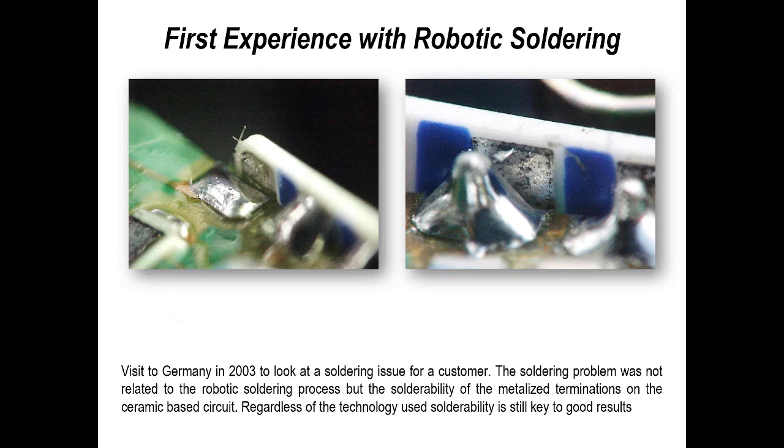So first of all, my first experience with robotic soldering goes back to 2003, and I was invited to a company in Germany who had a soldering problem. I was working for one of the material suppliers. But it wasn't actually a robotic soldering problem, it really was a solderability problem, as you can see in these 2 photographs. The metallization on the ceramic hybrid was not really suitable for the application, and consequently there was the problem, not the machine doing the work. So often the case in many process issues when you look at them.

So in terms of the robot experience, just a little bit about that first of all. It's something that I've put together with a couple of colleagues. The whole idea is bringing together suppliers of robotic soldering systems, materials, in one area and building some test boards. So that's the hands-on feature, and that will be done under COVID guidance. It's something that we'll be announcing dates on in the future. After that, the content of what we do will form more webinars, more technical presentations on more specific areas of design, manufacturing, materials, etc.

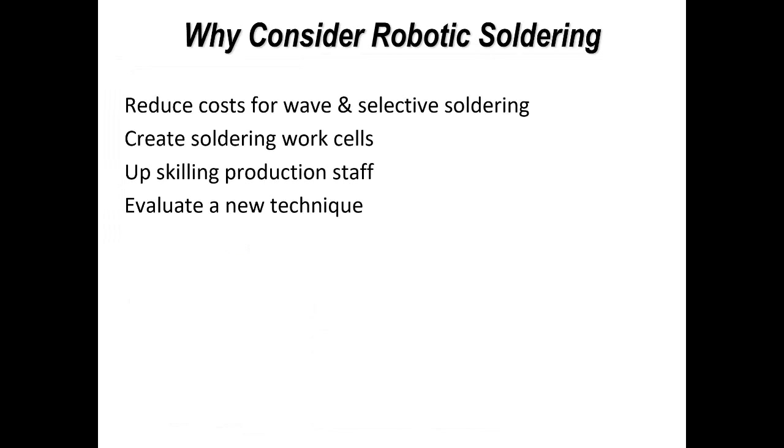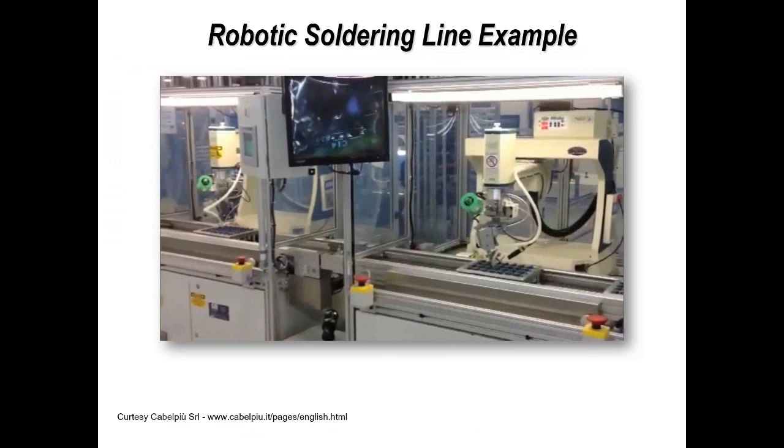This is partly - I'm going to be telling you about some results that we achieved a few years back in 2014 when I worked with Dr. Chris Hunt of the NPL on a high temperature soldering project. One of the two reports, which you can freely download from the NPL website, goes into our experience with robotic soldering, but using high temperature alloys as opposed to just traditional lead-free alternatives. We'll mention some of the results that we got in that study as well during our webinar, our time together, but you can find out more of both of these reports free of charge from NPL.

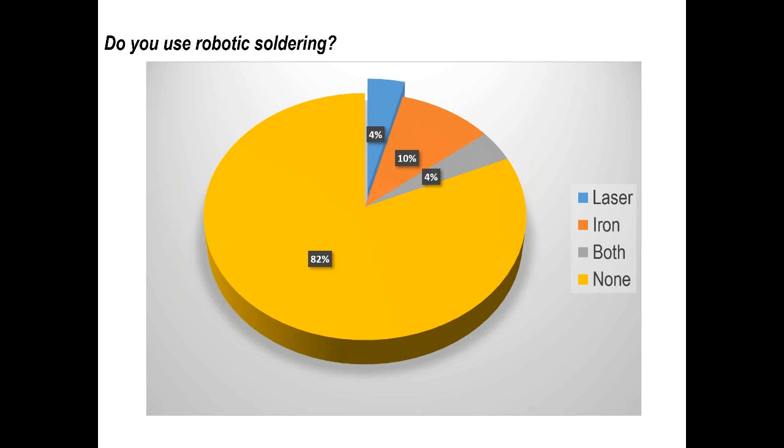A little bit of information that we gathered from a previous webinar in terms of a survey - we'll be running four mini surveys today, and you will receive the results of all of those. The last time we conducted this survey, we asked, do you use robotic soldering? As you can see here, it's a fairly small percentage of companies using robotic soldering, either laser, contact, or both, but a high percentage not using any of these techniques, which is not unsurprising, but hopefully the result on this particular question, when I pose it later on, will see quite a dramatic change, I believe.

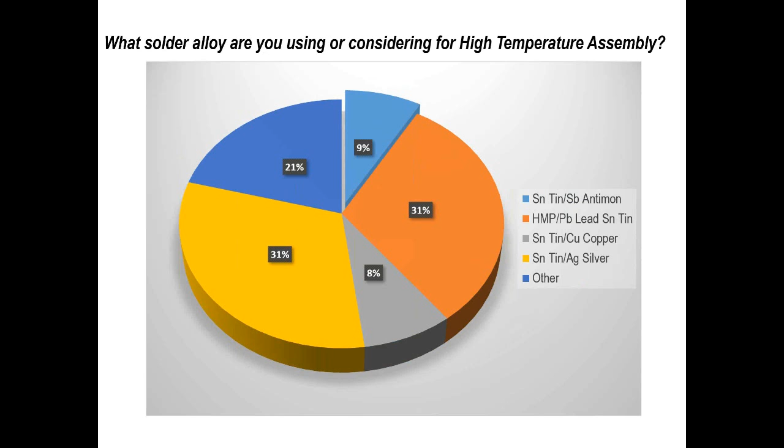In addition, we also looked at the materials that people wanted to use. Again, on one of the survey questions I'll ask this afternoon, we'll look at that - what materials are key for you to use. We were in fact concentrating on the higher end temperatures in the previous survey, but

you've got the opportunity for low temp as well when we come to that question. Now, the things we did on the NPL project using robotic soldering, but also using hand soldering and selective soldering as a comparison, we assembled polyimide boards. The reason for using polyimide boards originally was because the product was going to be exposed to high temperatures. As you can see here, we built boards with different solder alloys. We also built some boards with intrusive reflow technology and epoxy materials for other surface mount components, which won't be

discussed this afternoon, but is in the reports that I mentioned. We then took the boards and exposed them to 200 degrees C for 500 and then 1,000 hours in a static oven, with microsections, X-rays, optical inspection. We did other testing on the boards as well to understand the effect of thermal shock and peel strength results on other substrates, materials, and copper foils.

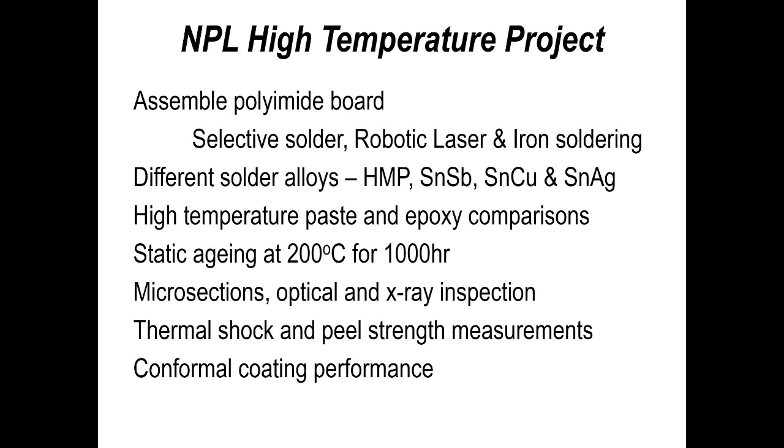So there's some other material in the other two reports over and above the specifics relating to robotic soldering.

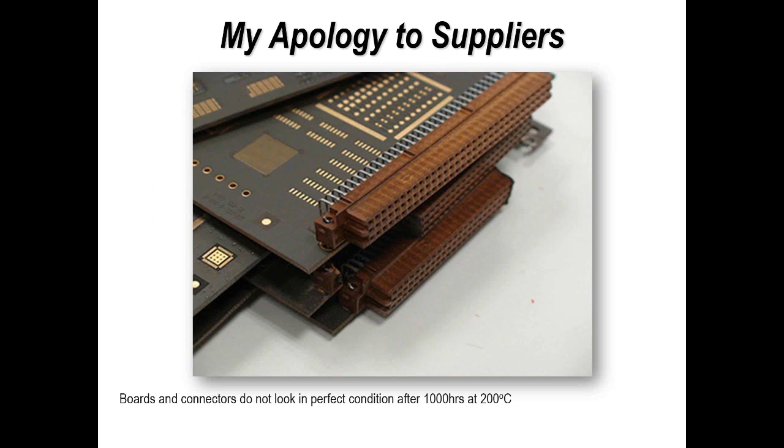And I always like to show this slide and apologize to anybody who supplied me boards and connectors for this particular study - they don't look very attractive after you've stored them at 200 degrees C for 1,000 hours. So I apologize to Merlin and I apologize to Harting on this particular occasion. But thank you, they still work perfectly.

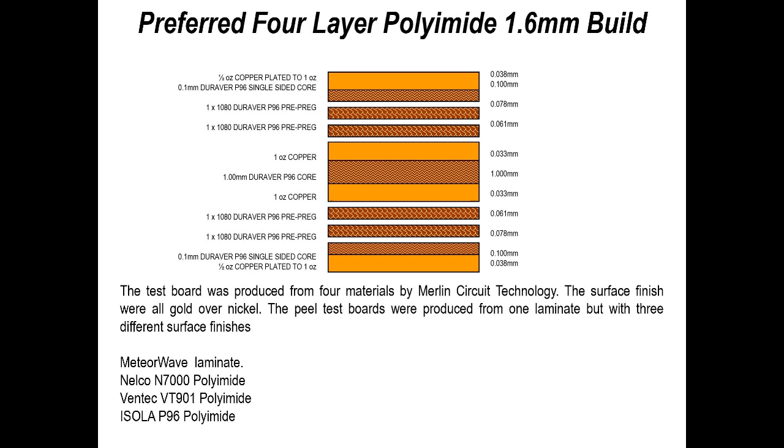So the polyimide construction is here. I won't go through it because you've got it as a reference. You can see the standard construction we used on our test boards, and we used 4 different materials on the NPL project.

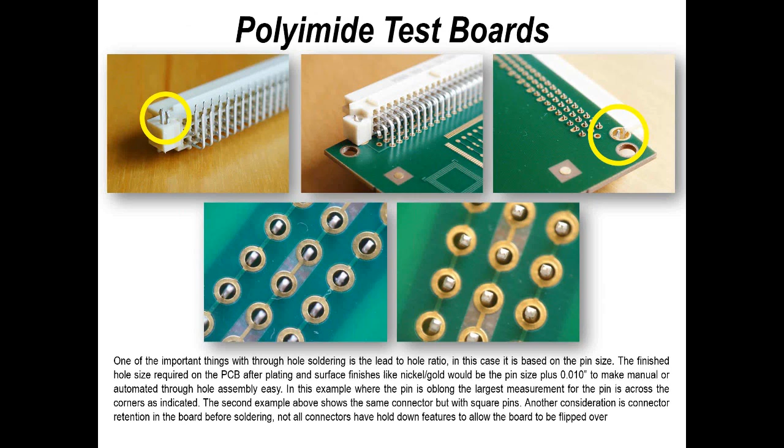The project involved simply soldering this 96-way connector. It's a high temperature connector, held in place with clips at both ends, allowing us to rotate the board and solder. As you can see here, we had 2 different types of pins, a square pin and a more flat pin on some parts, and that's all to do with cost reduction when manufacturing connectors. Connector pins used to be round, which was nice and easy to calculate hole to lead ratio. Then we went to square, and now more commonly we use flat punched connector pins.

So in terms of design rules, on the new board I'm using for the experience, and also on this board, we used what I call my standard design rules: the maximum pin size plus 0.010 of an inch gives me my finished hole size. I use this for all types of soldering operation.

Standard pads, but with robotic soldering, with some of the simpler robotic systems, you might want to extend the pads slightly, have a slight tail to it, a pear-shaped pad perhaps, and this allows you to have a landing position. So rather than hovering above the surface of the board, which some companies and systems allow you to do very successfully, if you need to come in contact with the board surface, then you've got a landing area which won't damage or catch the edge of the pad - you're actually coming down to the pad area.

In terms of solder mask rules, the same - standard pad dimensions, solder resist 0.006 of an inch larger than the pad size. It is possible also to use resist-defined pads, and sometimes that is done on smaller pitch connectors if you're doing drag soldering with a robot. The reason being that you're still making contact with the pad, still transferring energy to allow the soldering operation, but minimizing the possibility of

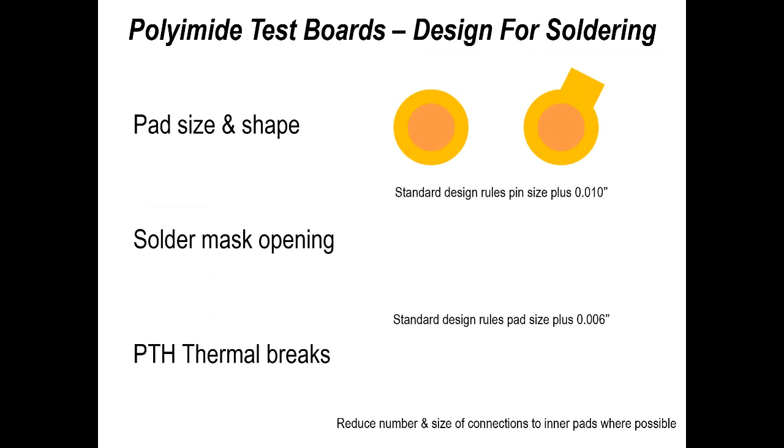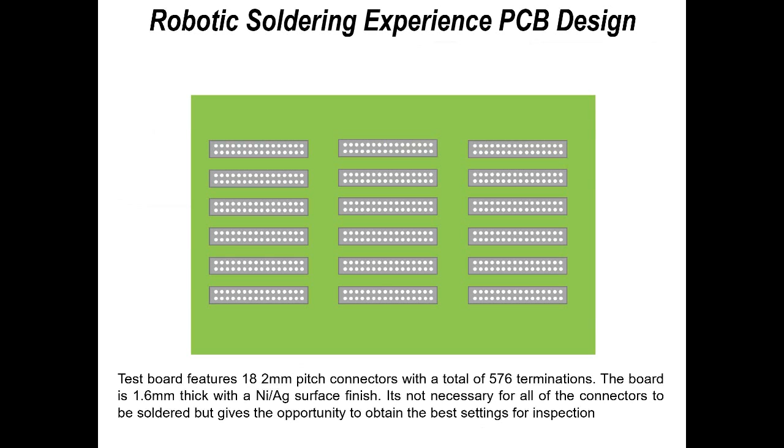So by adjusting those and maximizing to what the designer wants, but also what the process engineer wants, that's a key thing to get the best results. We've done that on the test board I'm using in this experience, and also on the boards we built at NPL. So basically connectors, standard through-hole terminations, modifications on resist and pad dimensions to aid the soldering system you might be using in your product or process.

I mentioned thermal breaks. This is an example of a thermal break in the inner layer. Our test board is a 4-layer board. It could be more, but 4-layer is economical for this application. You can see the same hole size is used, but we've increased the separation distance between the copper and the inner layer copper, or reduced the track width, or reduced the separation, using perhaps one connection, two connections, or four connections. These variations are incorporated into the test board to see the effect on soldering parameters. It's a standard thing that we do.

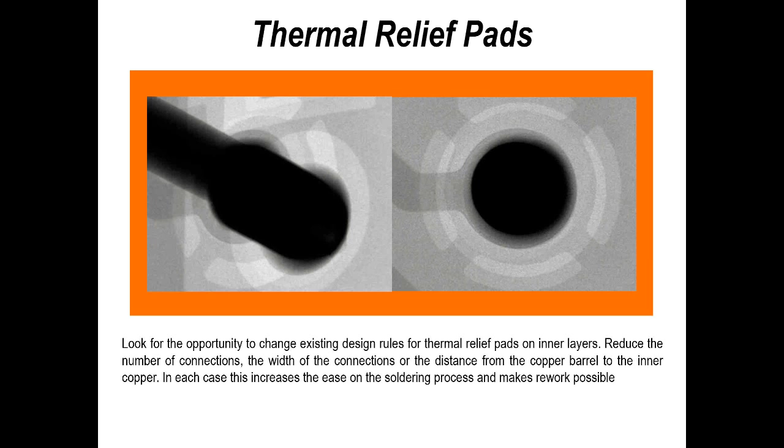If you look at this in X-ray, for those not familiar, this is what you might see. You can see the individual terminations fanning out from the solder connection area. I normally use this photograph to explain to rework operators why they're having such a hard time, and of course blame the design engineers for it, but there you go.

Now, in terms of assembling a board with a connector, one fairly simple thing we've got to consider is how the connector stays in the board. It won't just be connectors, it can be any through-hole component, but you've got to think about how you hold it in position. If you've got a connector with retention clips, that's nice and easy - you can flip the board over and you don't need any other tooling. If you can't do that, you might need a pallet, so you'd load the connectors to the pallet, load the board to the pallet, and run that through your process.

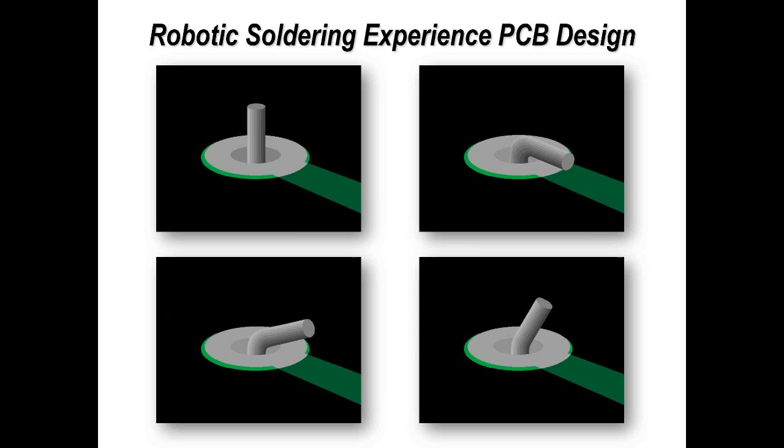But equally, you've got to think about the pin position and the consistency of the pin position. If you've got manual cut and form pins, they're inevitably going to be in different positions. So if you're programming your system to make contact with a pin, that could be an issue where you get inconsistency. Just think about the relative pin position in the plated through hole, the length of the pin, etc. Very trivial issues, but they can become major issues if you allow them to do so.

Now, there's a variety of different solders out there. These are the solders we used in the NPL project. As you can see here, there are the traditional lead-free materials, as well as some of the higher temperature materials. One of the things I want to do is work on low temperature alloys because they're becoming available with cores in them - you can get cored wire, but low temperature, reflowing at 138, 139 degrees C. That's not something I've done at this moment in time yet, but these are the materials we used in the NPL study.

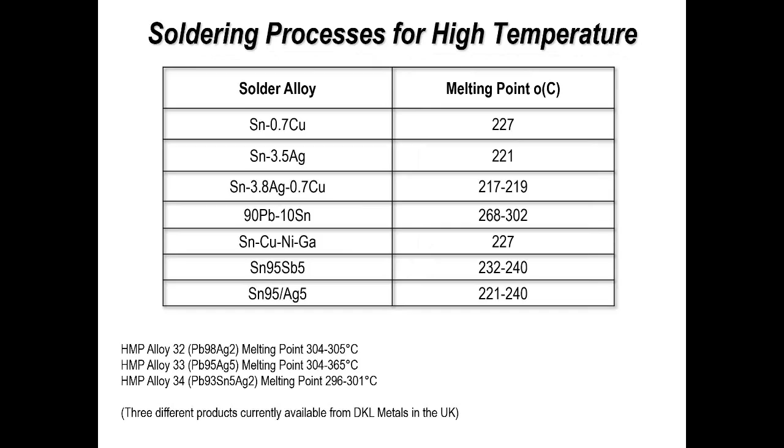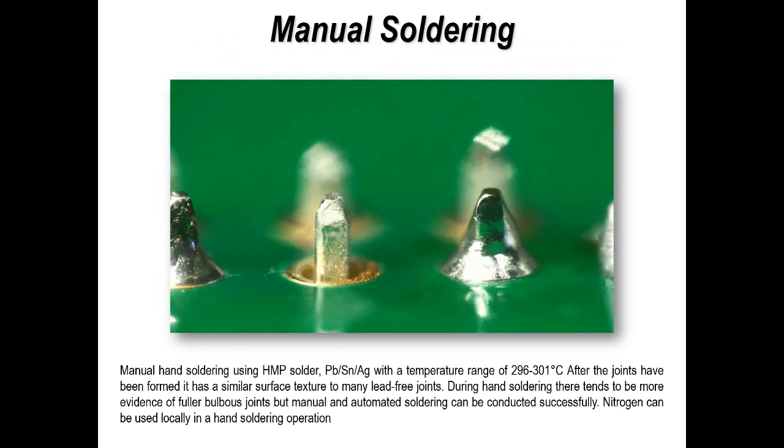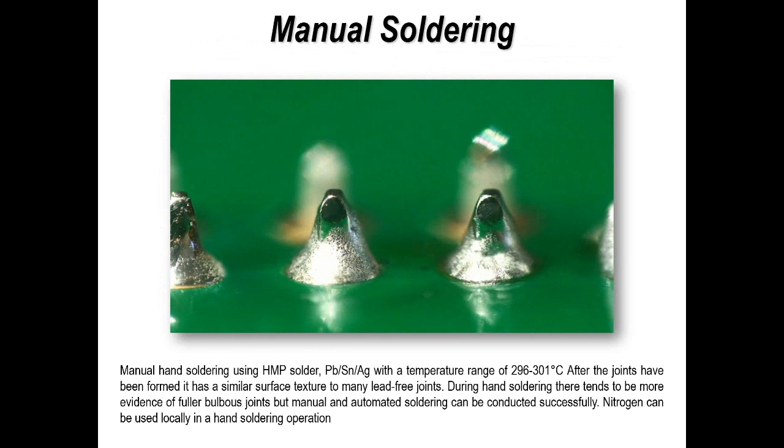And it's the same when you're looking at through-hole fill. When doing manual soldering or robotic soldering with higher temperature materials, you do get or can get variation. Although these joints are perfectly good, there is certainly variation in hole fill, and you certainly get that when you start using high temperature solders with hand soldering. One thing with hand soldering or robotic soldering - remember that when you've made a joint, if you go back and try to add a little more solder, because you're not actually adding flux to the opposite side of the printed circuit board, the visual appearance will be different.

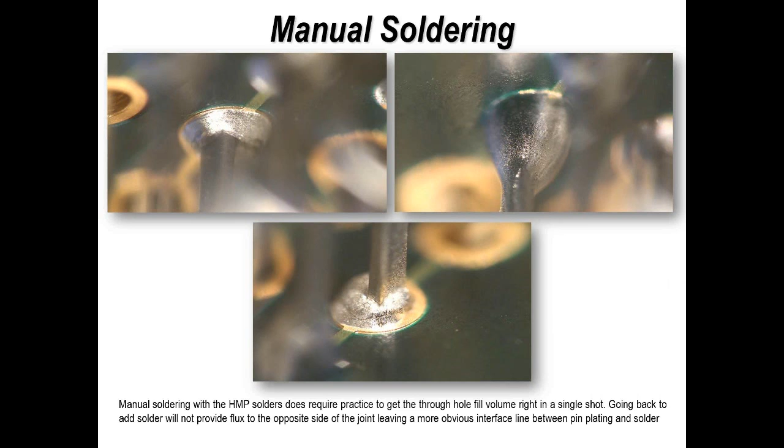Here is a good example of me touching up a joint, and you can question the wettability or solderability in this example, but the one thing that was missing is the flux. There's no flux left to improve that result. So that's just a thing to think about.

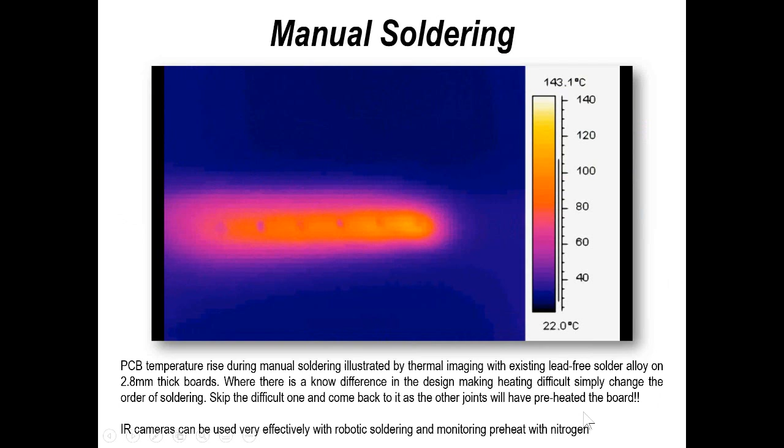Another quality control and process tool I've used over the years is IR for measurement and assessment. It's a beautiful technique, so if you have an IR camera in your facility, it's useful. It lets you see the residual heat held in the board. If you've got a difficult position to solder, you can jump over it and go back later, because heat remains in that area. So you might solder contacts 1, 2, skip 3, go to 4, 5, 6, 7, then come back to 3. You can do the same thing with robotic soldering - that's the beauty of it. So if you have an IR system, use it, because it's very useful for a number of applications with robotic soldering, which I'll mention.

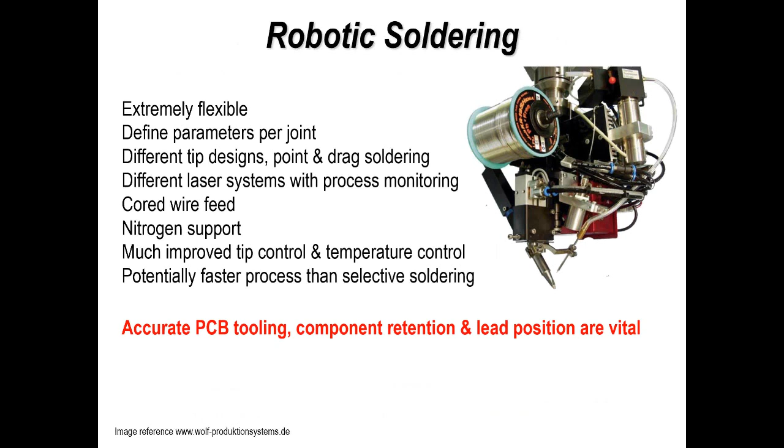That's an advantage to many people. One of the things a lot of people forget about is accurate tooling. A robot, you tell it where to go and what to do, but if what you want to solder is not in the right location, or not in a consistent location, that's a problem. So concentrate and make sure you organize or select a system and the appropriate equipment to minimize variation in the relative position of the joints you're trying to solder. Don't underestimate this as something you need to look at.

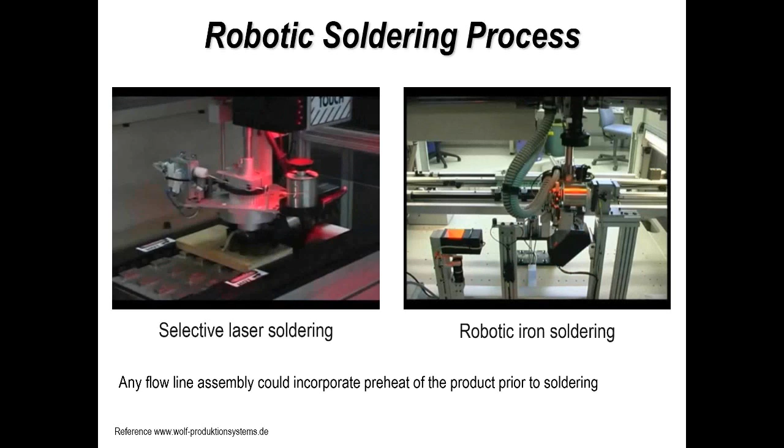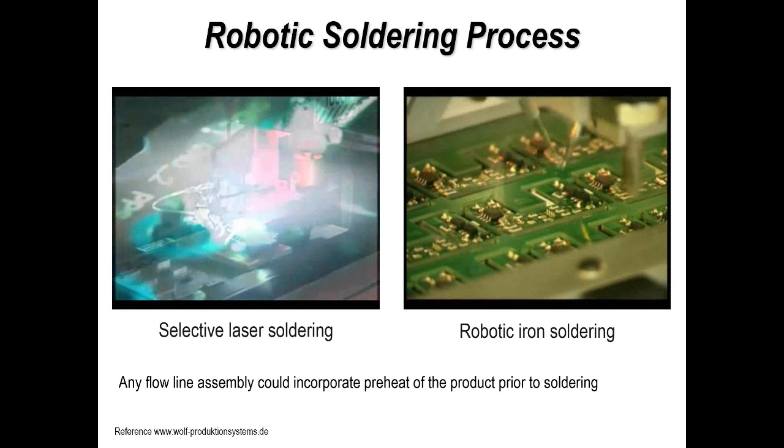So just a couple of examples of robotic systems operating. On the left-hand side is a laser system where we're producing joints, and on the right-hand side you can see an inline system which has been added to a conveyor. You can see the joints being produced on the left and on the right. These are just two examples of robotic systems in the marketplace that I was using in my original study.

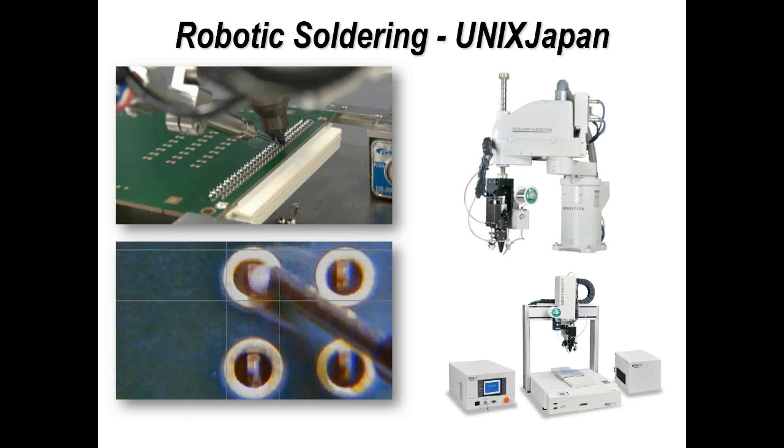Here you've got Japan Unix, and on this first board we're actually doing drag soldering with a special tip, drag soldering on a 2.5 pitch connector, one row. In the bottom video clip, again you can see my same test board, and we're doing laser soldering to the individual joints. That gives you a feel for what we're talking about in terms of the process we're using for this technology.

So if we flip back for a second, remember that when we're doing a soldering operation, we're basically bringing a tinned bit to the joint area. We're introducing solder to the joint area, normally from the opposite side if we're talking about manual soldering, and this makes sure the joint areas to be soldered are up to temperature. This is how I train people to hand solder, this is the fundamental way you do it.

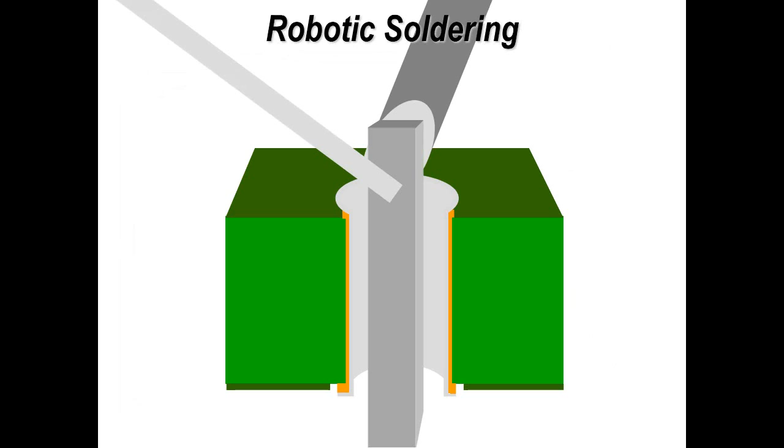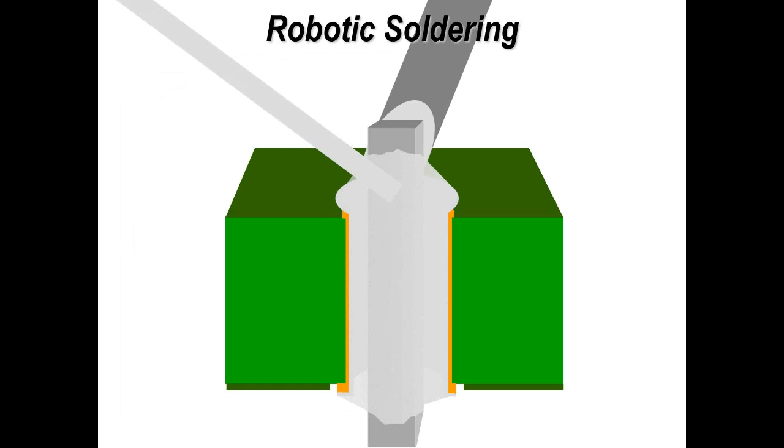But with robotic soldering, you may be introducing solder in exactly the same way, directly to the soldering iron tip, or you might design your system to have quite a wide tip which comes into contact with the surface of the pad and the contact position, and then add the solder slightly offset, onto the face of the soldering iron tip. This overcomes some of the variability you can get with pin position. These are subtleties you need to practice and learn about when doing robotic soldering, particularly your programming, and when talking to your suppliers. But this is fundamentally what we would do.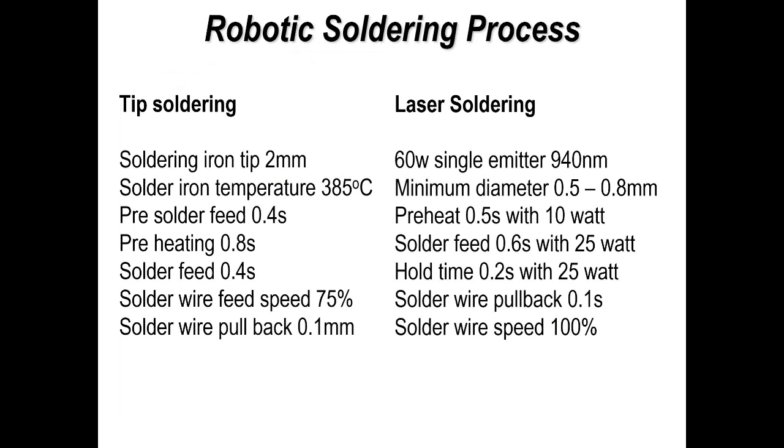So just to give you a feel for some parameters, these are typical parameters you might come up against during a soldering operation or a setup operation, ones I used in some of the studies I did at NPL. You can see typical cycle times, etc. On the laser side, you can see the cycle times, the delay times, and the energy used during the soldering operation on that 96-way connector I mentioned previously.

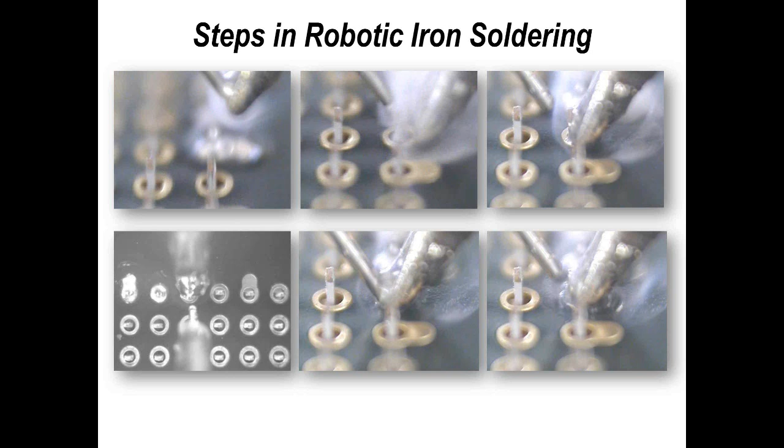So let me just step you through. If you're looking at contact soldering, i.e. a soldering iron on a robot, to break it down into simple terms: we tin the tip, we may have cleaned the tip—we'll look at cleaning a little later on—we bring the tip into contact with the pad and pin, or just the pin. When that gets up to temperature, because we've done previous trials or direct measurements, we introduce the solder to the opposite side of the joint, as we would with hand soldering, or alternatively add it to the surface of the tip. That's fundamentally how the soldering operation is done.

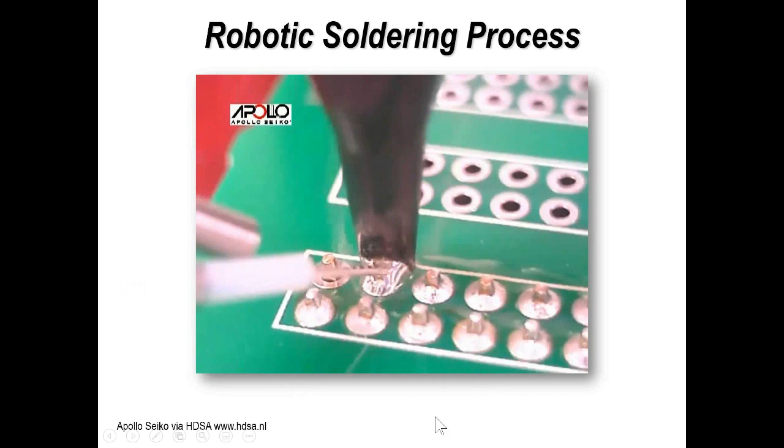If you look at this example, you can see a wider tip being used, and the machine operator or setter has set up the solder to add to the soldering iron tip, but it's slightly offset from where the pin is. So again, it's all about setting up the process most appropriate for your particular product.

Now on the laser side, in these multiple photographs taken from one of my video clips, you can see the board and the solder wire above the surface. What's actually happening is we're introducing a small amount of laser energy to the board to preheat it. When it's up to temperature, we introduce the solder and continue to feed it based on the volume required to fill the hole and give you ideally top and bottom side fillets, which is what we want in our process.

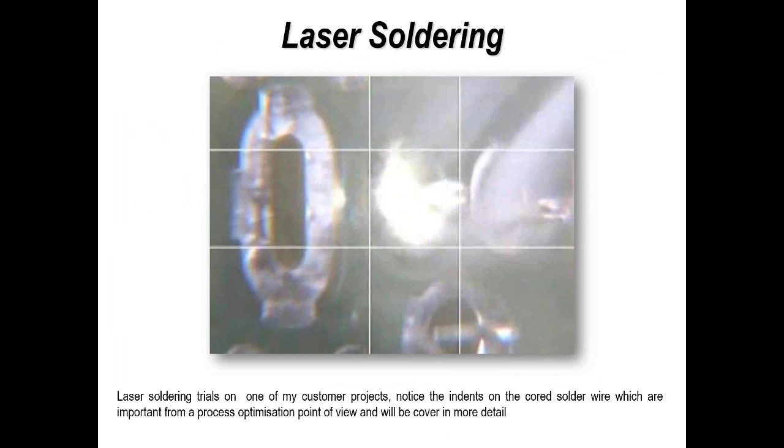So if you look at this example, another video clip, you can see a practical example on a printed circuit board with a number of different through-hole terminations being soldered. There's no soldering iron, you're just using the laser energy, and adding solder to the joint to finish off the product.

In terms of how you get the information to continue that soldering operation, each of the different suppliers have different levels of software to allow you to capture information. You can either teach it, which is slightly laborious, or you can draw in the board, and there are different levels of sophistication in the software available within the industry.

This is just an example of one of my old test boards. You can see at the back the connector being drawn in, which gives us the locations, and then we can select the individual pins and set up the parameters we want to use for those particular parts.

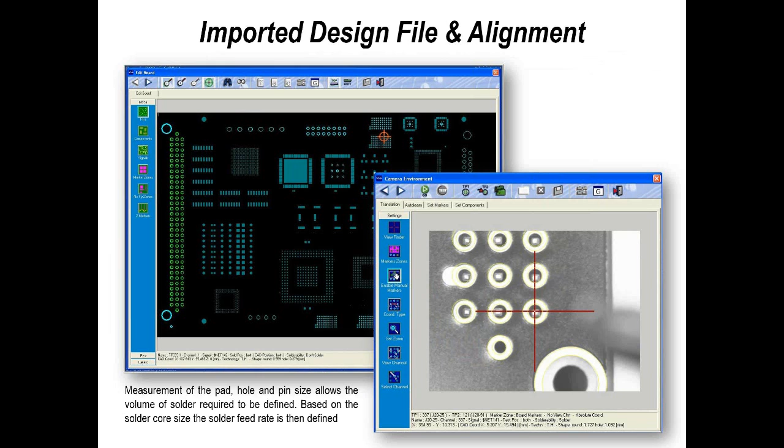Ideally, all of those parts would have the same basic parameters in terms of time and temperature. But as I said earlier, if you've got different thermal breaks, which is what we've got on our evaluation boards, there will be a difference in the required settings.

Just a couple more examples before we take another survey poll. These are some of my trials on the 96 pin connector on a multi-layer board. You'll notice on this, and on the next example, there is a lot of flux.

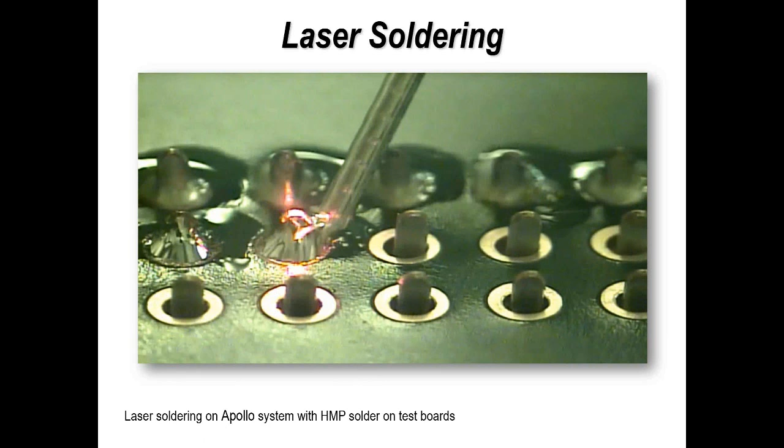Remember, some of the materials used in these studies were high temperature materials, and because of that the basic material has a high flux loading. So we're not talking about traditional lead-free, and most cored wire manufacturers have worked hard to improve not only traditional hand soldering with lead-free, but also robotic soldering. You'll find differences in the amount of flux present on the board surface. These high temperature studies were done in 2014, and there's been a lot of development since then, but fundamentally the soldering performance was good.

You just have to look at the necessity in these examples, because of the alloys, to clean the product for visual and possible reliability reasons. So that's a couple of examples of what you might expect with very high temperature materials using either process, but there's also a significant improvement in the amount of material left behind with the materials now being introduced.

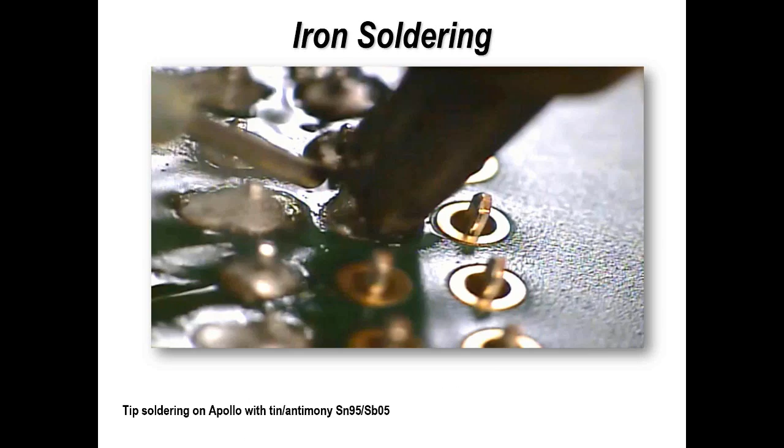Cored solder wire - there's lots of good suppliers of materials out there. You've got to look at the size, and typically some of the materials I used in my study were 1mm, 0.8 and 0.6. Those are the materials that I use, and you'll find that nearly all of the suppliers can handle that sort of range, and possibly smaller.

There hasn't been any trials on low temperature so far, and that's one of the reasons I'm very keen to see some results on some materials that I've got. Cored wire has obviously got flux in it, and flux is volatile. The suppliers have taken quite a lot of effort to improve the performance, so we'll try and understand what the issues actually are.

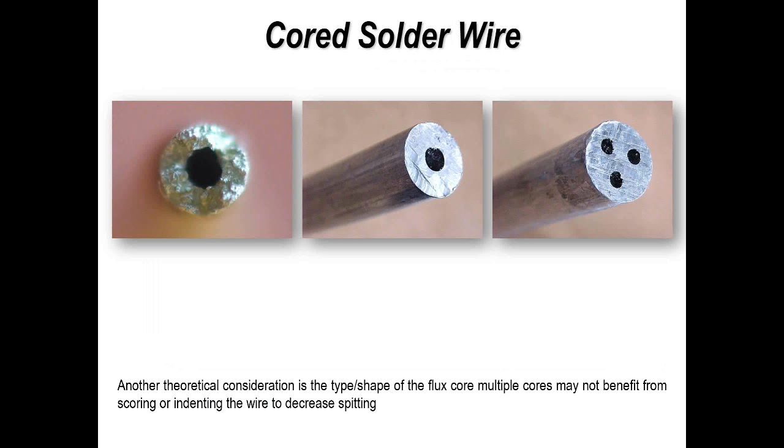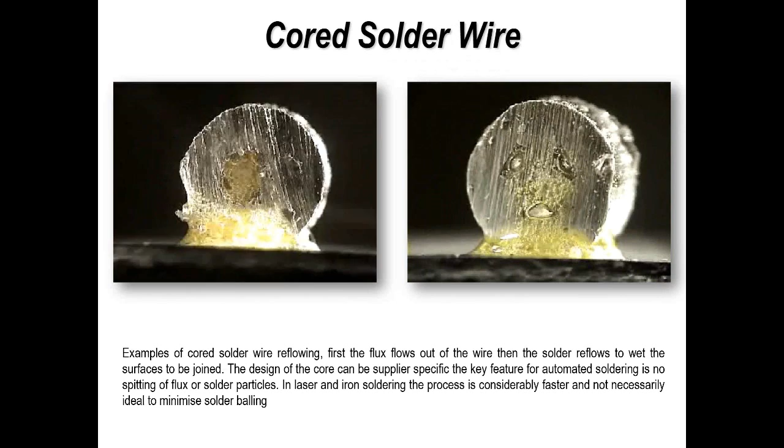If you look at a cored solder wire - now I'm just showing an old video of mine where I'm reflowing two bits of cored wire, one with one core and one with three cores, and you can see the poor guy on the right-hand side crying as he disappears and falls away. But it just gives you an idea of what's actually happening. So the flux flows out from the solder wire, and if we can control that in some way, then we can control and improve the soldering performance.

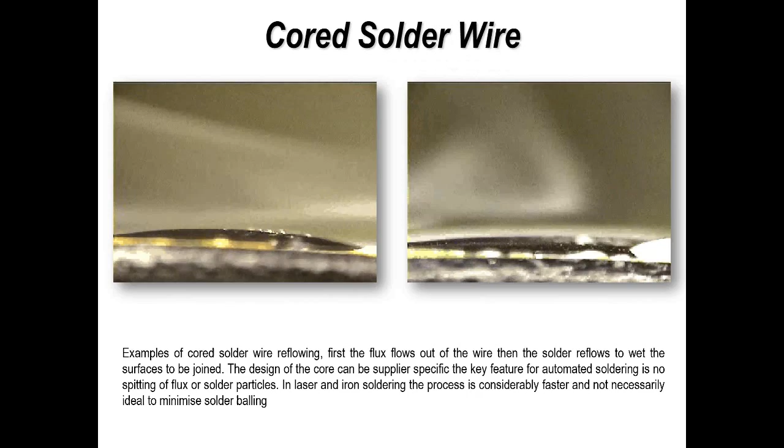If we take a printed circuit board - this is just an example of a test board which has got some fine pitch packages on as well as simple through hole. One of the problems potentially you or anybody could face with robotic soldering is solder balls. This is just a couple of examples from trials of my own, and what I've done here is circled the solder balls. This is a well-known issue.

If you step back, it's been around for quite some time, and it still is today. But we can control this in two or three different ways. That is the reality.

And part of the reality is adding the solder directly to the surface of the soldering iron tip, which is at an elevated temperature - this causes spitting. Trying to go too fast increases the possibility of spitting.

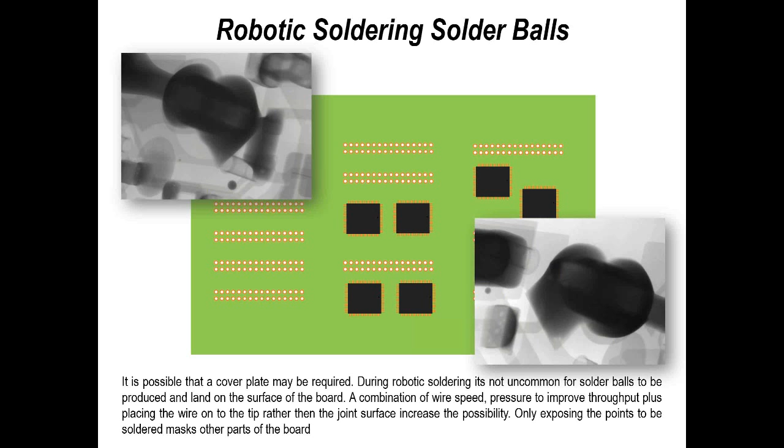So you will find, if you go into some factories, some companies, the way they've gone to overcome the problem, or perhaps temporarily improve it, is to cover the board. In this example you've got a cover plate, and I've worked in two factories like this, where we're just using a cover plate. We're soldering 2, 3, or 4 connectors on a board or other terminations, but protecting other areas to prevent any solder balls landing on the surface. This is particularly true of the automotive industry. It's an extra thing that can be done, and it can be done as a temporary thing - not ideal, you don't want it forevermore, because it does restrict the way in which we can effectively use some of our tools.

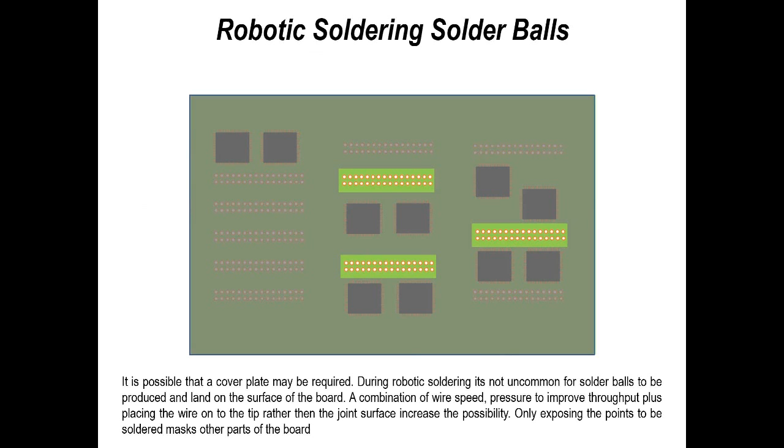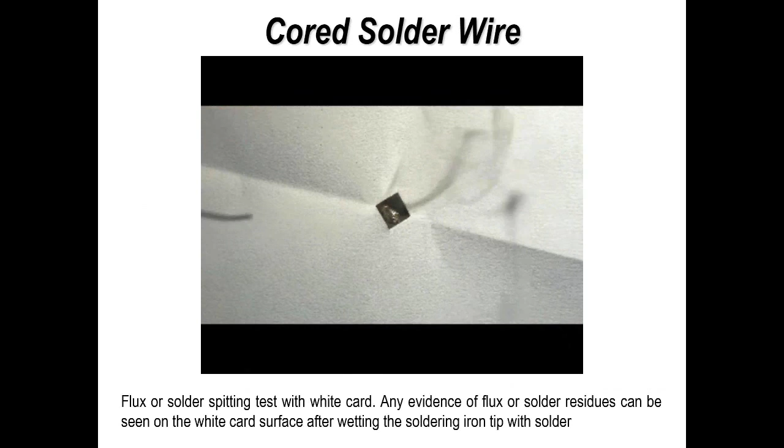If you look at solder wires, all of the suppliers nowadays will be able to demonstrate their solder wires, and you can look at the performance. You can do simple tests yourself where you add solder to a soldering iron tip through a hole in a piece of white paper. Very simple, but it works, and you can see the effect of spitting - where the flux actually disappears to, and also where the solder balls appear on the white sheet. So that's a very simple, very crude way.

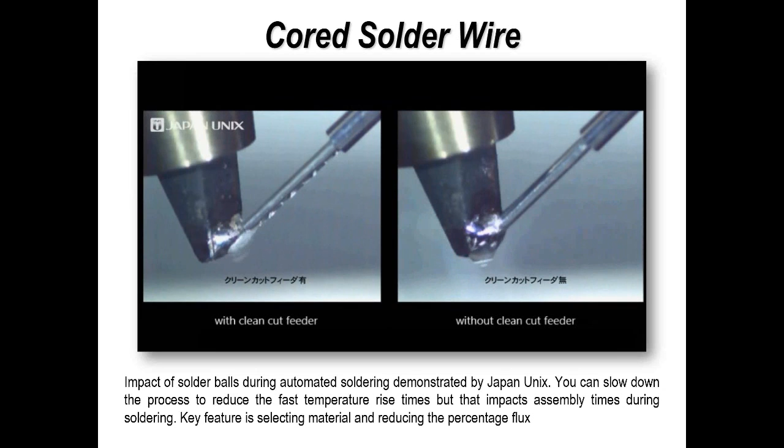This is all about wire preparation, and this is something I learned early on with one of my projects. Basically, if you've got a volatile material sealed within a lump of solder, as soon as the solder becomes a liquid, there is an expansion of gaseous material from the surface, which can lead to solder particles being spat around.

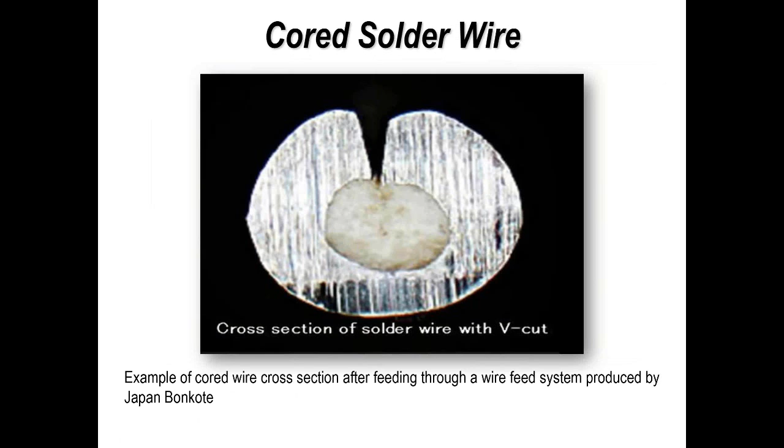This example cross-section here is from a small company in Japan who developed a simple method of V-scoring wire. They did this for hand soldering operations during the introduction of lead-free, and they used this particular technique.

You'll find that the majority now of robotic soldering systems, be it laser or contact soldering, have in their feeder mechanism a blade which indents the wire. Now, I choose to believe, I may be wrong, that originally whoever came up with the methodology for feeding wire stumbled across the potential for eliminating solder balls, and then everybody else followed suit. That's my personal take on it, but it's been developed very well by different suppliers.

So these are photographs of mine where I've got some wire that's been indented, but what I've also done is x-rayed it so you can see the core. As you know, with an X-ray, if you've got a solid material, it's dark in color, and if there's a void, it's light in color. So you can see the void line where the flux is, but you can also see the indents within the wire which are present.

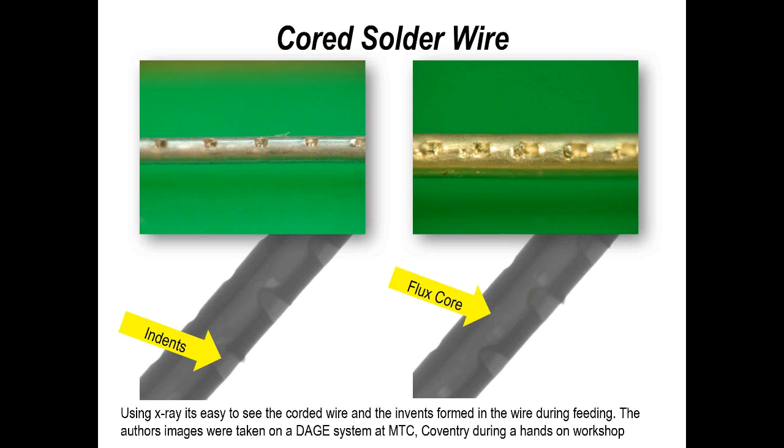And what this does is allow the volatility to escape during the soldering operation without projecting solder balls over your product. This little video clip highlights this with Japan Unix on their system. If you look carefully with this high-speed video, you can see the flux coming out of the holes prior to going onto the soldering iron tip, which minimizes the possibility of this volume of material being spat out on the surface of the board.

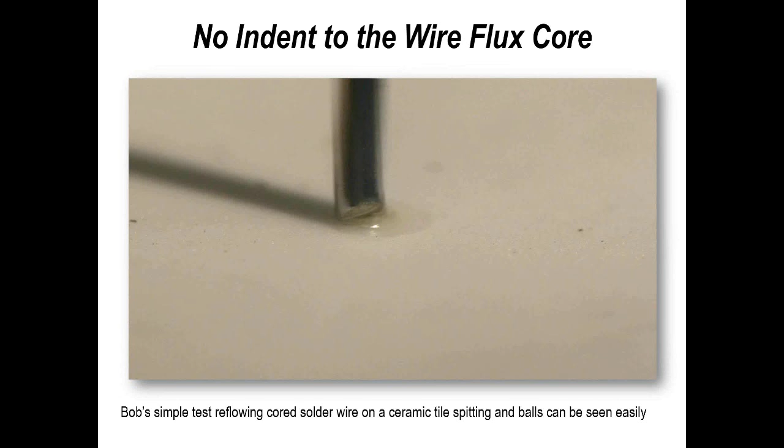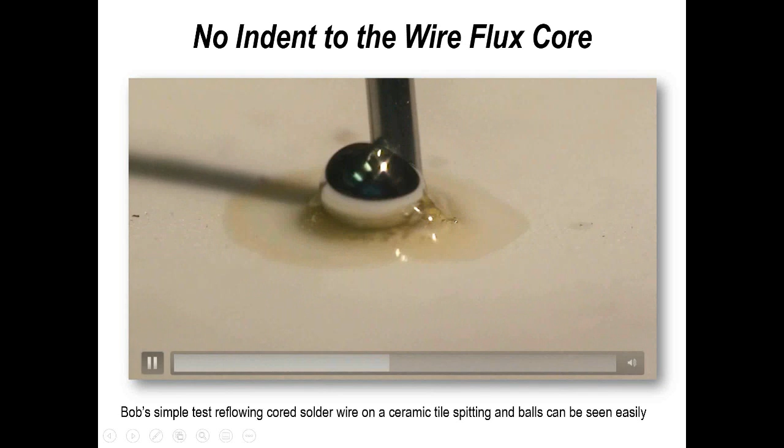So it's just a nice example. Now, Bob Willis, I always have to do it a simpler way. This is a little experiment that I did just on a ceramic plate, a normal ceramic plate that you might use for solder paste evaluation.

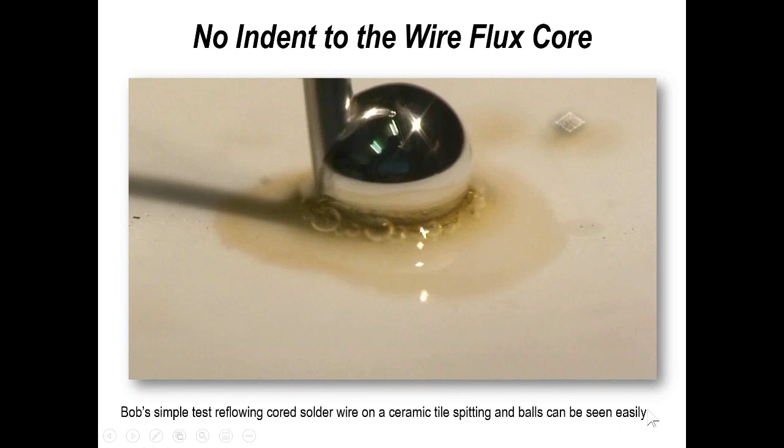And if you've got no indents at all, you will get solder balls. The solder balls you'll be able to see on the surface of the white ceramic, and that's the reason why I used it.

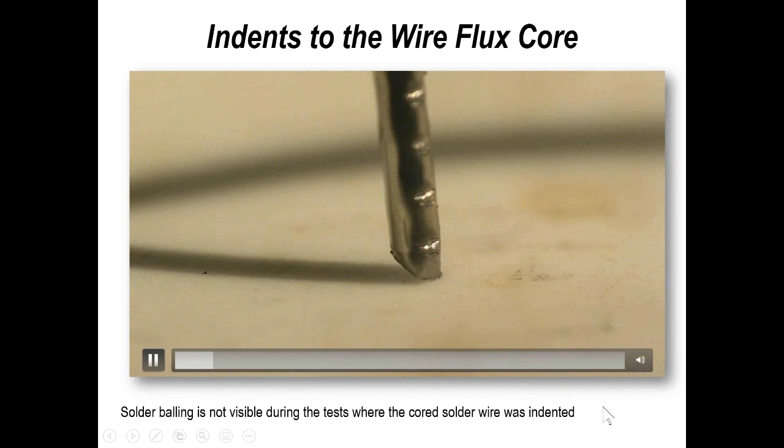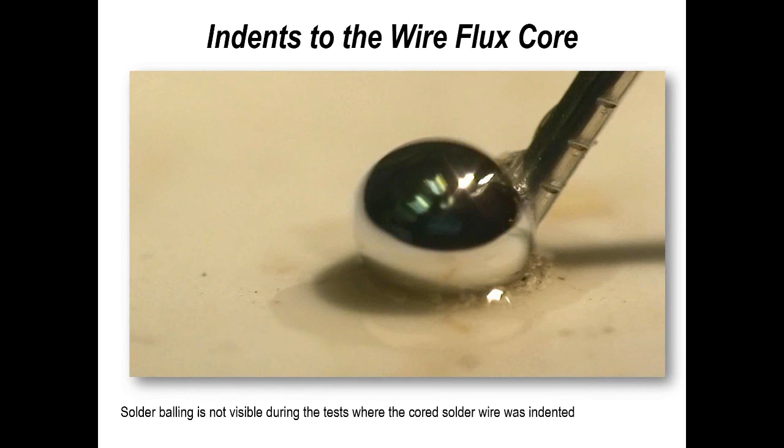If you look at this video clip, you can see on the right hand side the marks on the surface of the solder. So if I run exactly the same video clip, you'll see the solder liquefying on the surface of the ceramic. You can see the flux coming out, but there's no solder balls. So again, releasing that energy early significantly reduces the volatility.

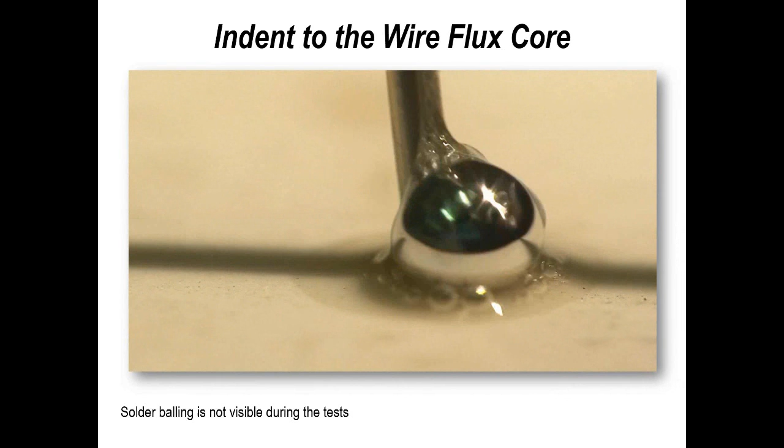And again, you can see exactly the same thing happening in this example. The third example is the solder wire again, but I'm not reflowing it, I'm just heating it up. So in this example, you can see the liquid slowly coming to the surface of the wire from those indents.

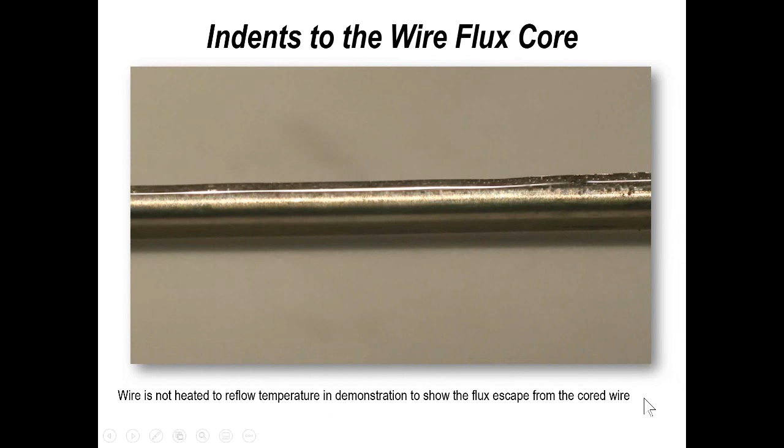So that indentation is quite a crucial thing. Controlling that, making sure it works successfully. Again, most equipment manufacturers have the capability of modifying the amount of indentation, or even changing the wheels which create it in the first place. So that's just a little thing you want to be aware of.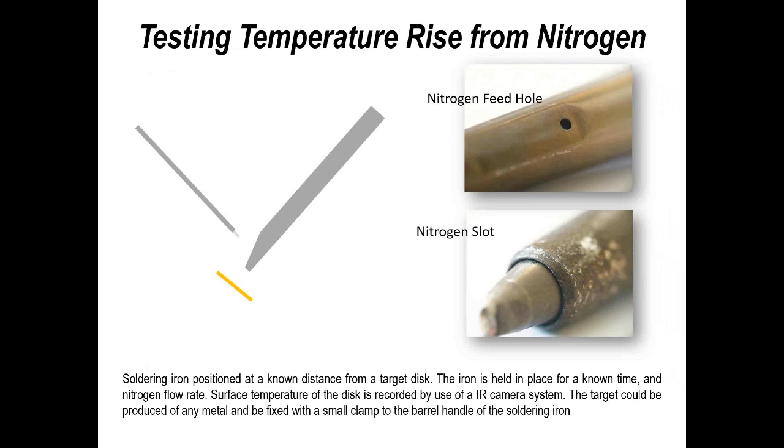Now, if you're looking at temperatures and measurement, I mentioned using nitrogen - well, controlling the flow rate. Some soldering iron manufacturers' systems used on robotic systems have developed their technology to allow nitrogen to be introduced around and across the surface of the soldering iron. If you control the flow rate of the nitrogen, you can use that as a preheat. So you can perhaps get an improvement in terms of soldering of parts of a second, but over a day, that's minutes.

So again, that's something that might be advantageous to you, and that preheating exercise can be beneficial. Introducing nitrogen across the surface of the joint and the soldering area has two benefits, which you can see in these examples.

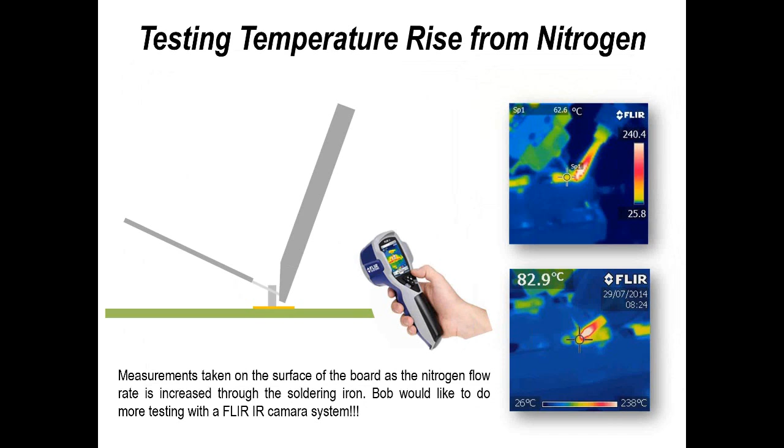Also, the angle in which you introduce the solder to the soldering iron tip or to the rest of the joint can be analyzed, again using IR technology to do the measurement. So if you have a system, I think use it because it is beneficial.

And I apologize, everybody will be rushing out and buying an IR system. So if you've got a budget to spend, that's something that's a useful tool. And if anyone wants to send me one in the post to use, I'm more than happy to receive it.

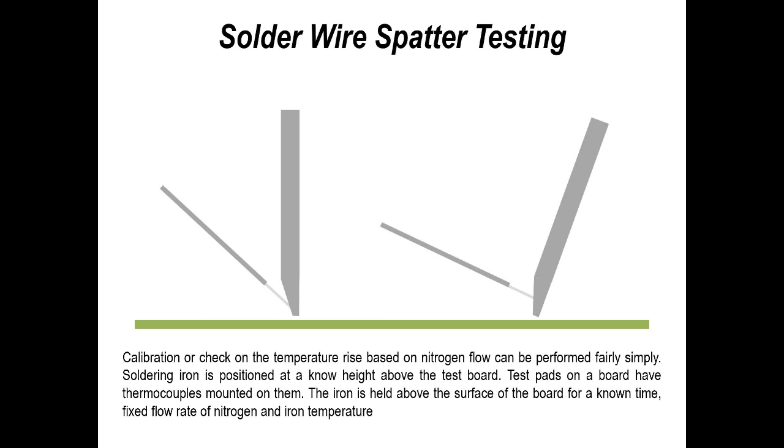You could also use another simple technique where you're actually measuring flow rate. Just like my wetting indicators I use in reflow technology, you could use a pattern where you're introducing solder to a test pattern and then looking at the spread-out rate for different parameters, different nitrogen levels, different cored wires that you're using.

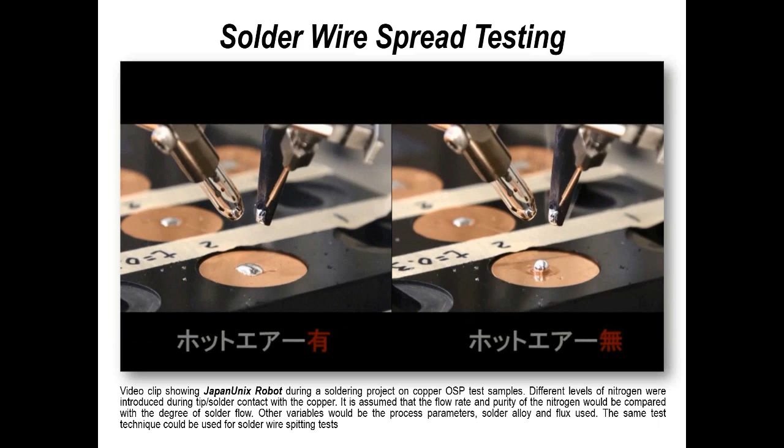Now in terms of soldering irons, designs, and tips, you've got to look at the temperature response time. There are tip suppliers and suppliers of soldering irons themselves who have better responses than others, and that's something you need to evaluate yourself.

But also the important thing is that if you are mechanically scrubbing the board, if you are mechanically making contact with the board and putting any pressure on the tool, potentially you can reduce the working life. So where you're able to minimize that wear characteristic, you get a better working life, and you're not going to run out of tips quite so quickly.

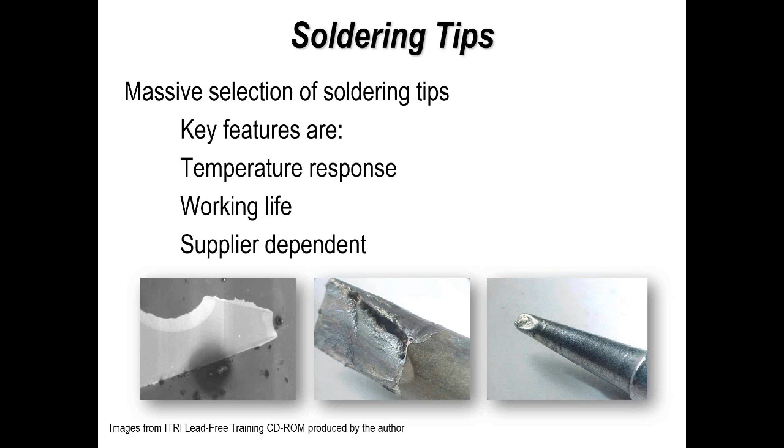Also, you need to evaluate the tips. Some tip manufacturers are exclusive to a particular supplier, and for good reason, because of the calibration and traceability. But you need to understand that when you're selecting a system, because it can be an expensive commodity when we're talking about tips and tip replacement.

Now in terms of cleaning tools, there are a variety of options, and basically a cleaning tool is similar to what we do with a soldering iron. You either use a sponge, a moist sponge, which is still my preference, I have to say, if used correctly and you train your staff correctly.

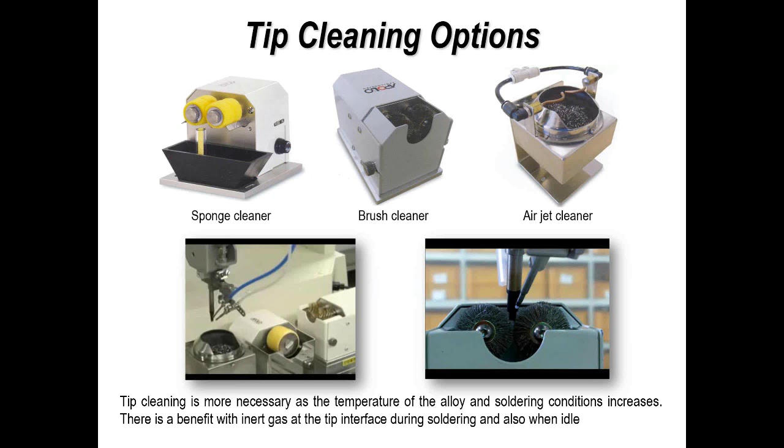But there are other techniques, and I just wanted to show the sponges, the brushes, air jet, where you're actually blowing off residue from the surface of the tip. So there's three or four different technologies that you can consider, but it's certainly something that is necessary as part of your work cell for your soldering process. Evaluate them to see what works successfully for you.

Okay, so just looking now a little bit at the soldering and soldering results side of things. I wanted to show you some information based on the trials we did with the higher temperature materials. But before that, I wanted to go on to our third question.

Our third question is, what do you expect? What is your aim? What do you need to do with your current soldering process in terms of inspection? So what class do you expect, do you require of your product? What is the most common class that you work to on products today, and or you would equally require from a robotic soldering system?

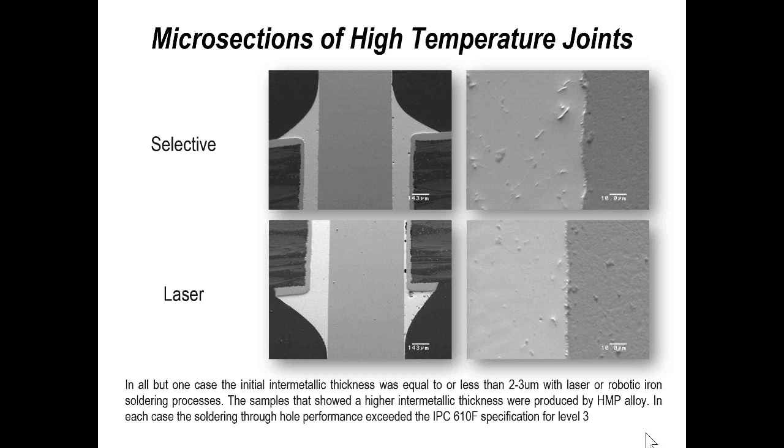In terms of when we examined the joints after producing them and then thermally aging them, we obviously saw changes in the characteristics of the joints, mechanical strength of the joints, etc. And of course, we saw changes in the intermetallic thickness based on that storage time. The storage time was just a comparison time and temperature that we were using for some other studies.

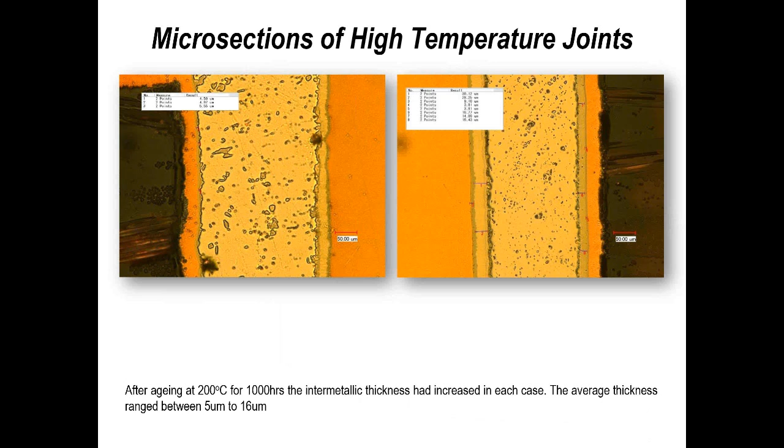But you can see the difference in the results that we saw just on the intermetallic level, and I've shown it for the different alloys. Now, this is an average of multiple samples, but you can see the soldering process and the material we were actually using. So it just gives you a feel for what you might expect to see.

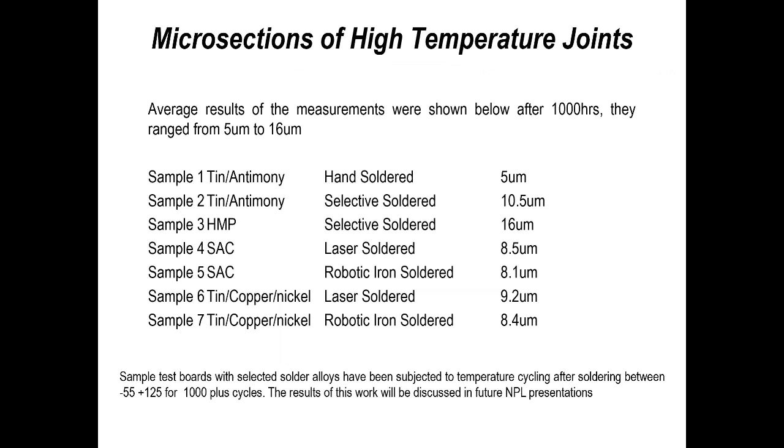Some of the samples, as I said earlier, we went through temperature cycling as well as part of a separate part of this project. And then what we did, just to compare, and this is something that some companies still do, is doing pull strength measurements and assessment of joints if they're changing their process, so if they're going to an automated process as opposed to hand soldering. So you might choose to do this as a method of comparison if you're looking at laser, contact, selective, etc.

This is normally where there's a high intermetallic formation or some other factor has affected the surface plating on the pin itself. The other third failure mode is the pin breaks. Generally speaking, when I'm doing testing of through-hole terminations like this, it's normally the pin breaks. But after aging, these are the two types of failure modes you might expect to see.

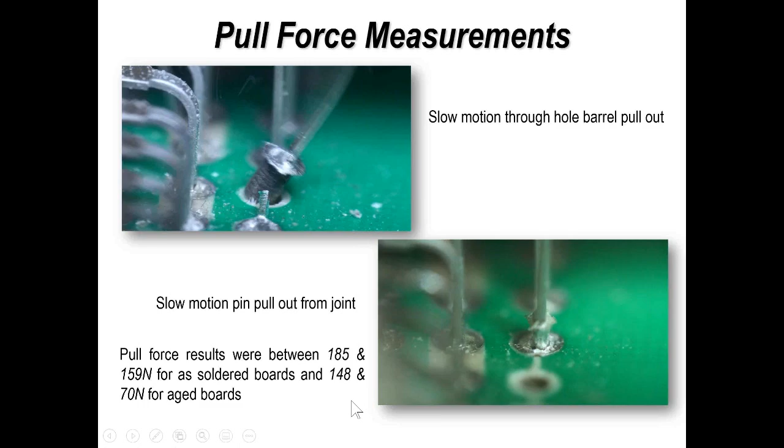So the next section I want to go on to is some defects with laser and contact soldering. But before that, what I want to do is the final survey with you, and this is about the materials. So what solder wire would you like to use if you were going to laser or contact soldering? Is it tin lead? Is it lead free, traditional 220 to 230, low temperature if that was available, or high temperature for some applications? So which solder would you generally be wanting to use with your robotic soldering system?

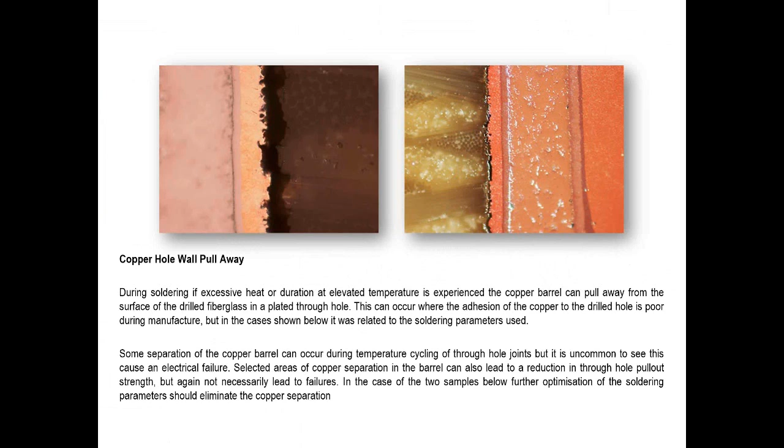So hole wall pull away is separation of the copper within the bulk of the material. But again, maybe material related, maybe temperature related. It's something to understand and evaluate.

Now, these defects and other defects are covered in my video of the month on defects, and also in the NPL report. Pad lifting and fillet lifting is something I have seen on a number of occasions during the introduction of lead-free technology, and also during this particular exercise. It is not uncommon.

The interesting thing is, when we look at pad lifting, shown on the left-hand side, this was happening in the late 60s and 70s on thick multi-layer boards. There are reports out there if you go to some of the early work in laboratories, in tin lead technology, it's just the board expanding and contracting during the soldering operation, and the solder wets the pad, but as the board contracts back, it separates, so you get this lifting phenomena.

In terms of the solder lifting off the pad, shown on the right-hand side, what we call fillet lifting, again it's the mechanics of the solder as it solidifies at different rates and different positions within the barrel of the plated through hole and on the surface of the pin. And you do see this.

This is not necessarily a widespread issue. It's just something you will see if you look hard enough. It's just like we never knew we had voids until we bought X-ray systems. Same thing, if you look hard enough, you'll probably find it.

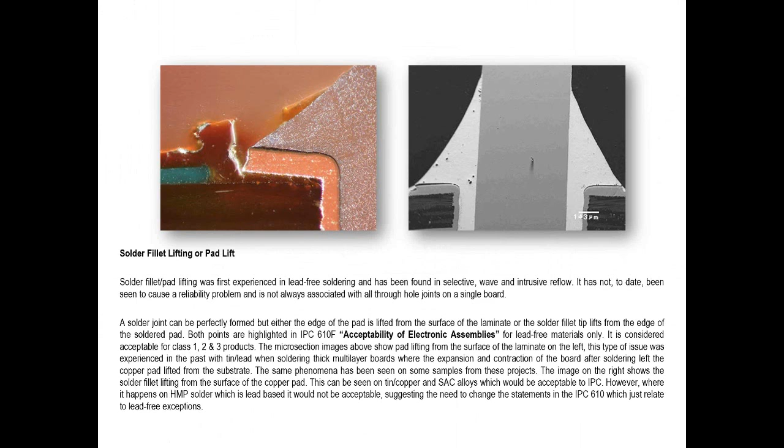So, another example of a defect. Onto solder balls, which I've mentioned a few times, and it's one of the things you may well see, depending on how you set your process up and materials you use. But 9 times out of 10, it's just spitting from the surface of the soldering operation, which I've shown you with some excellent high-speed videos, and my own simple experiments, where you can see the impact of indentation in the solder wire, the release of energy, minimizing the solder spitting and spattering during the soldering operation.

Okay, so robotics. Yeah, robotics and scuba diving. So it's 2 things I love. Well, scuba diving I love, and then the robotics is kind of a sideline at the moment.

So what I've tried to do in this webinar is just give you an introduction to the technology, talk about different parts of the process, what I've been doing, where you can get other information, etc. So what I want to do now is take any questions. Hopefully there are lots of questions that I can pick up on, and I'll try to do the best I can in terms of answering.

Amber asks, are the square pins for wire wrap? No, not necessarily. You'll find some connectors are still using square pins for wire wrapping, but it depends on the generation of the connector. I would suggest to you that it tends to be oblong pins more.